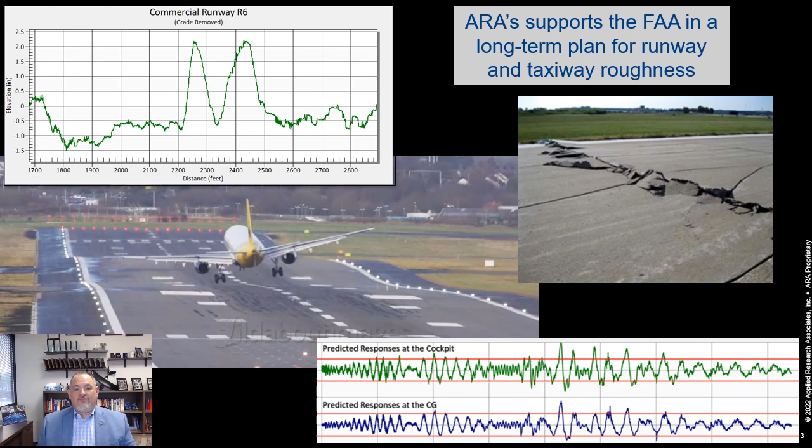Sometimes when you're flying over an airport, you look down and you see all the rubber deposits on the runway. Aircraft tires go from standing still to spinning at landing speed, which is generally over 100 miles an hour, in a very short period of time. This chirp of the tires as you land comes with a little bit of deposit of rubber on the runway. That bit of rubber means that aircraft tires need to be replaced every 120 to 400 landings.

That rubber on the runway decreases the friction properties of the runway because the rubber is smoother than the underlying pavement that has texture. That lower friction means that when you're landing in the rain, there may not be as much grip on the runway to help stop the airplane. ARA is working with the FAA and modeling runway friction and then measuring it in the field to validate the models. We're helping the FAA ensure that even in the worst of conditions, aircraft have adequate landing distance to safely bring planes to a stop. Innovative technologies and solutions that improve our safety.

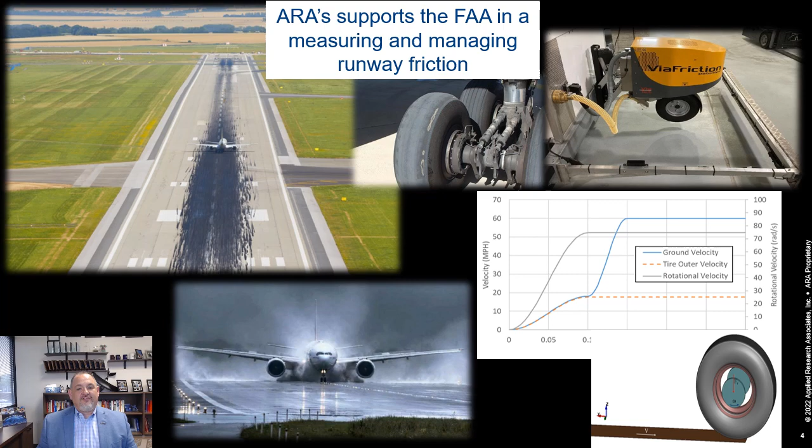Rarely, even with a smooth profile and good friction, an airplane is going a little too fast at the end of the runway. These are emergency situations that we never want to be part of. When our family flew into Reagan Airport on our trip, we could see that the airfield sits right along the Potomac River and up against the water. A runway overrun that goes a little too far, and our airplane becomes a boat.

ARA is innovating in engineered material arresting systems, or EMAS, to support safely stopping aircraft in the event of an overrun or an aborted takeoff. These EMAS systems are at the end of the runways at Reagan Airport, where we land on our trip to DC. ARA is working on inspection and maintenance best practice documents for the FAA that will be sent out to airports across the country to ensure that their safety systems are ready to go should an emergency arise.

We're also working on pilot education to document what happens driving through an EMAS, because pilots don't get trained and don't get to practice these types of emergency situations. Innovative technologies and solutions to improve our safety.

When the family pulled into Reagan Airport, we just went about our way through the airport on our trip. We weren't thinking about the security threats to the airport. We weren't aware of anything that Reagan Airport might have done to protect us from those threats. However, Reagan Airport is aware of those threats, and they called on ARA to offer innovative solutions to upgrade and harden the airport building to withstand some of those common threats.

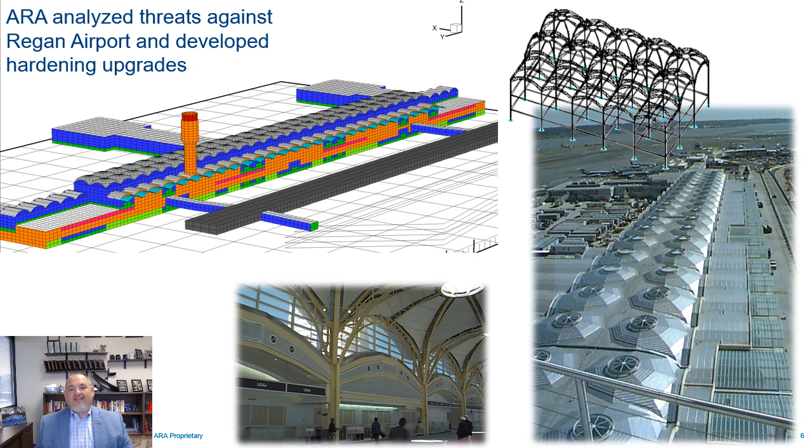In our post-9/11 world, we're all too aware of how our aviation system can be used as a threat. We're also aware that airports are gathering places for large numbers of people, and that could be a target. ARA's Southern Division is analyzing those threats and helping to harden our airport infrastructure to keep us secure. Innovative technologies and solutions to improve our security.

On our family trip, we're now going to leave the airport and move to ground transportation. The key component of that ground transportation are the roads and bridges that we drive on for this trip and also in our everyday life. When you travel on our roads and bridges, you may think that they seem to be in a constant state of disrepair. In fact, the 2021 report card for America's infrastructure gives roads a grade of D and bridges a grade of C.

Across our great nation, roads are a vital lifeline, but they're frequently underfunded. Over 40% of our road system is in poor or mediocre condition, and over 40% of our bridges are at least 50 years old, which is their design life. While the funding levels are a decision for policymakers, there's much that ARA is doing to ensure that when we design new infrastructure, we are creating a high-performing roadway system.

ARA's Transportation Infrastructure Division has developed some of the key design procedures that are used in the construction of our roadway network. ARA is the author and support contractor to the American Association of State Highway and Transportation Officials, which is commonly called AASHTO, really a trade organization of the state DOTs. ARA supports AASHTO in the development, deployment, and enhancements to the Pavement ME Design.

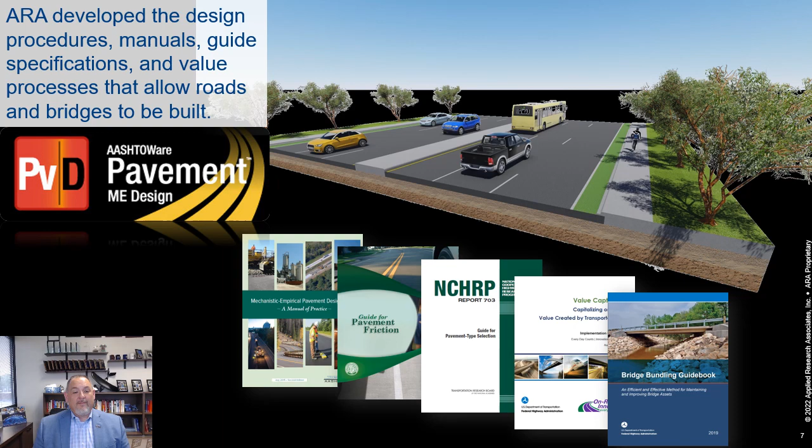We don't stop with these guides and manuals. We produce many more that help federal, state, and local agencies use our funds that we pay in taxes and fees to provide a high-quality roadway infrastructure. Innovative technologies and solutions to improve our safety and our way of life.

Nearly all roads and bridges are owned and maintained by a government agency, whether they're state, county, city, or township, or sometimes even private roads. Most agencies have more roads in less than ideal condition, and they don't have adequate funding. ARA helps these agencies learn about the engineering properties contributing to the pavement's condition.

We model and we forecast future pavement conditions based on the traffic and the weather and the support conditions under the road. And we work with those agencies to optimize the use of their limited resources to keep as many pavements serviceable for as long a time as possible. ARA works with agencies to deploy functional improvements based on critical pavement condition triggers, allowing those agencies to improve the value of their transportation assets more effectively. This type of work is called asset management.

Asset management in transportation started with pavement management. Pavement management started decades ago when a young Air Force lieutenant named Dave Artman worked with a team of researchers out of Illinois, including Mike Darter, to develop a way to quantify pavement condition using numeric values, and we still use that today to predict future pavement performance. Mike Darter sold his company, ERES Consultants, to ARA in 1999, and he just retired in September of last year with over 55 years in the industry. Dave Artman is still with ARA today.

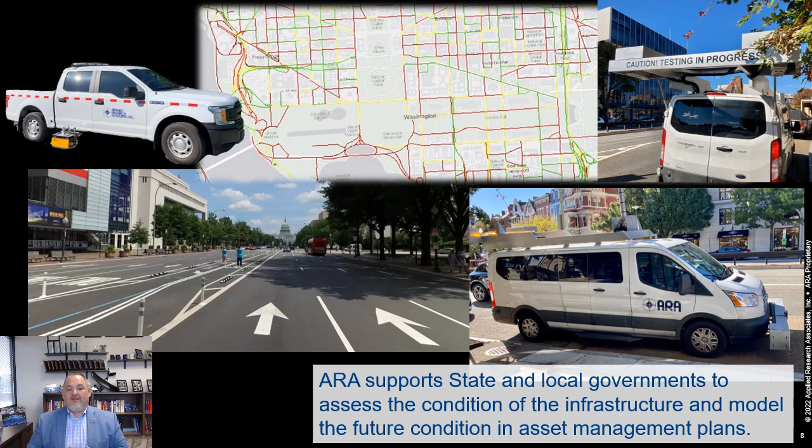A world that was just paint is now complex materials using multiple components, and it's advanced materials that help us and help our cars see the road around us. These are innovative technologies and solutions to improve our way of life.

As we continue on our family trip to DC, we took time to visit the monuments and the buildings that house the action here in our nation's capital. When you look at those buildings, whether it's the Supreme Court or the House Office buildings or Smithsonian museums or, heck, pretty much any other building in the DC area, in front of you, you'll often see these bollards as a barrier between the road and the building. The innovation, engineering, and science in those barriers comes from ARA's Southern Division.

The DC area is not known to have large space underground to build huge foundations for these barriers. And we want to keep our infrastructure and our monuments safe should someone want to drive a large truck up to them. So this makes design difficult, but the mission is the same. Protect the people and the infrastructure from any sort of vehicles that might be looking to cause harm. ARA provided innovative modeling and simulation of different foundations and barrier designs, and this resulted in what is the standard barrier that you will see all around DC.

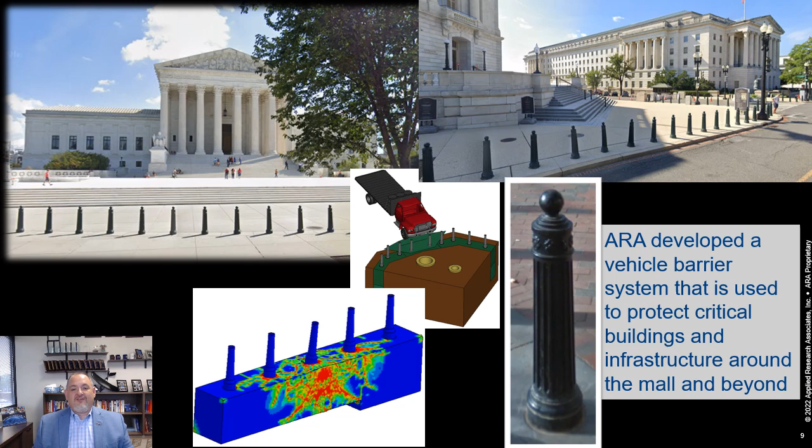As you're out and about in the DC area and you see this bollard in front of a building, you can know that ARA innovation allows this barrier to protect people and infrastructure. Innovative technologies and solutions that improve our security.

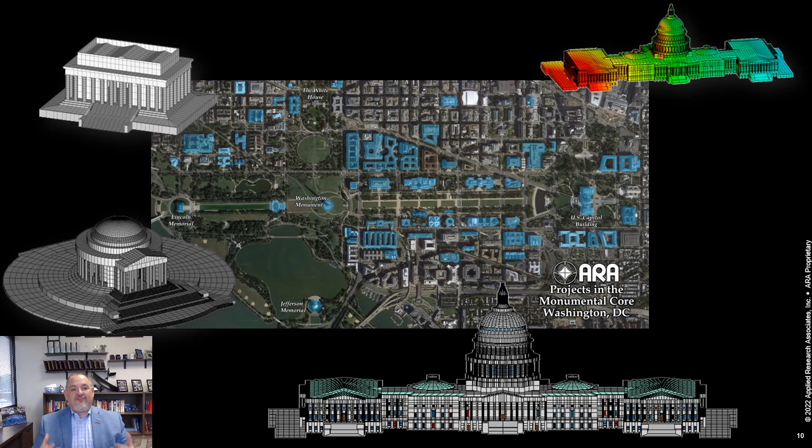As our family walks around the mall and the monumental core of DC, ARA's security engineering innovations are all around us in nearly every building that we see. Now, you're not going to see an ARA sign on these buildings, and unless you are part of this great employee-owned company, you might never know the impact that we, ARA, are having on the security of the infrastructure in our monumental core. These are innovative technologies and solutions to improve our security.

Our family trip is going to end with a visit to the founding documents of our great nation. I can remember the first time I saw these documents and how I was in awe of seeing the real thing. I remember watching my kids visit the National Archives and waiting in line to see the Declaration of Independence, the Constitution, and the Bill of Rights. I remember hearing from the staff at the National Archives on how there's a special vault where these foundational documents are stored to protect and preserve them.

What many people may not know is that ARA was key to the design of these special vaults that ensure that our foundational documents are preserved and protected from blast. The innovations that ARA brings to viewing these national treasures, it's in the background. It's not visible when you're there looking at the documents. ARA is innovating behind the scenes to protect our national treasures. Innovative technologies and solutions to improve our security.

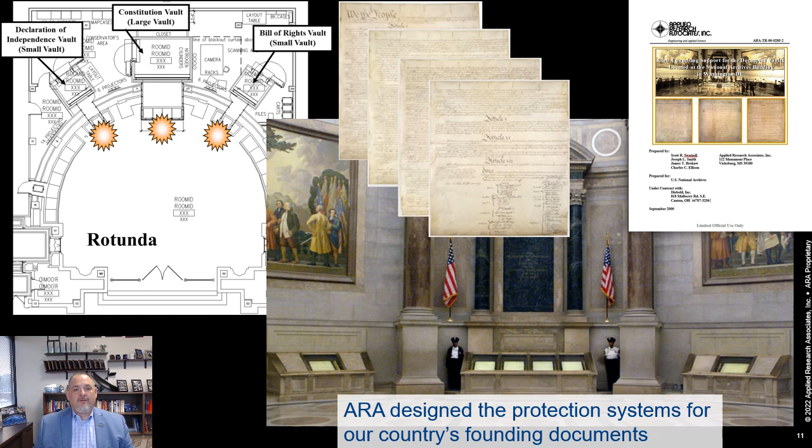In our family trip, we started on the airplane. We moved to the road system, and we ended up sightseeing around the mall in Washington, D.C. If you've done this in the past, or if it was part of a trip that you had to D.C. for a meeting, did you know that ARA innovations were all around you? Often ARA innovations are behind the scenes, and our impact is not known that well. You should know, wherever you go, ARA innovations are in the built infrastructure all around you.

The transportation and infrastructure sector of ARA has employee owners that offer innovative technologies and solutions to improve our safety, our security, and our way of life.